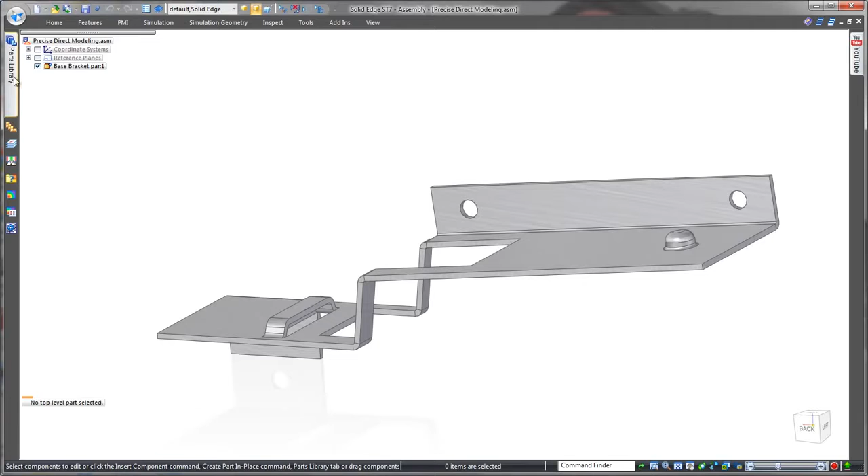First, let's bring in our spring clip and assemble it with the parts it was intended for. Clip to the base, and the USB block it needs to hold. The first precise change we need to make is to close up this gap between the top of the USB block and the spring clip.

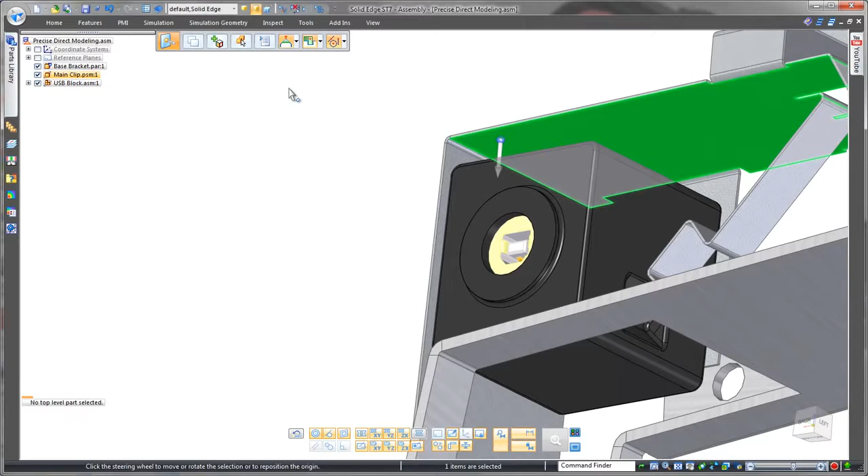In most any other CAD system, you'd have to make this change at the 2D sketch level with sketch relations. In Solid Edge, we can simply relate faces in 3D instead. Easy. Looking at the back, I notice the tabs on the top are not quite square with the top face. No problem, a couple more 3D relations will fix this.

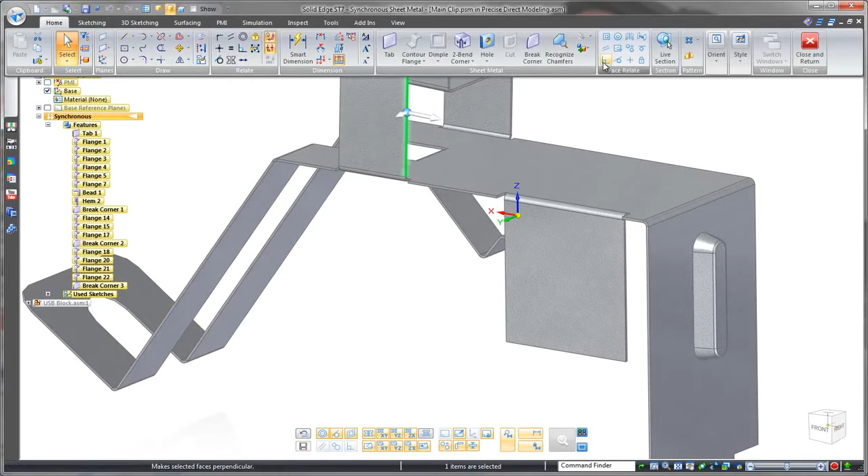For the side faces of the tabs, making them perpendicular to the top. And for the top faces, making them perpendicular to the side. And notice how both tabs are being updated here. That's the intelligence of synchronous technology.

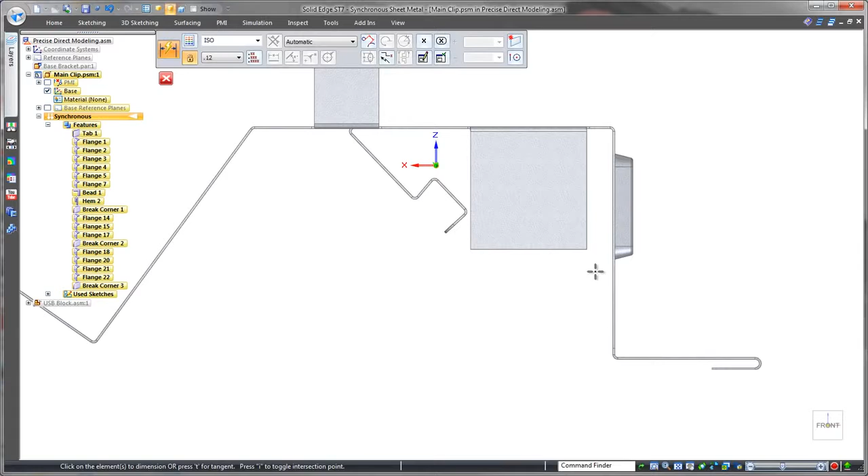Let's start detailing this model. And of course dimensions are key. Solid Edge has two main ways to dimension. The first is like most any other CAD system, in 2D when creating a sketch for a feature, but the second, which you see here, is unlike most any other CAD system, and much more intuitive. Just dimension the 3D model directly.

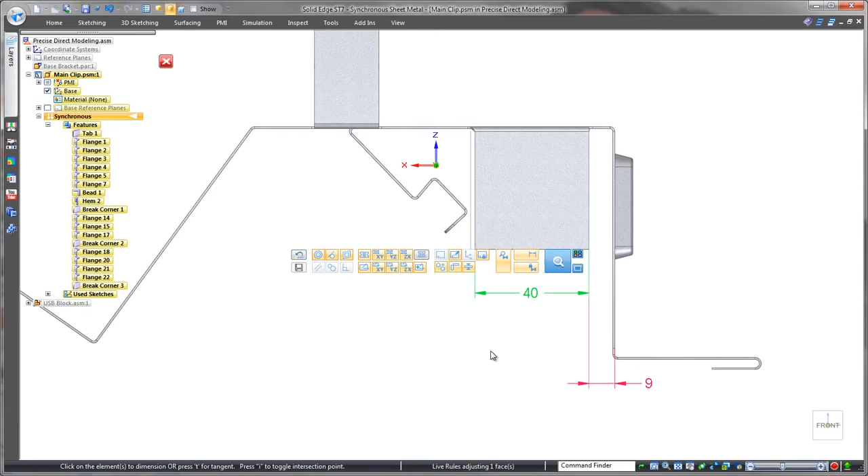We can leave this floating so that we still have the flexibility for further changes, or lock it down to be precise. We'll lock this down and we'll add another one for the flange width. We'll dimension these top tabs next, and look closely at the precise control that's provided. These green arrows allow us to control the direction of the change, which side moves and which side stays put, or even a symmetrical change if we wish.

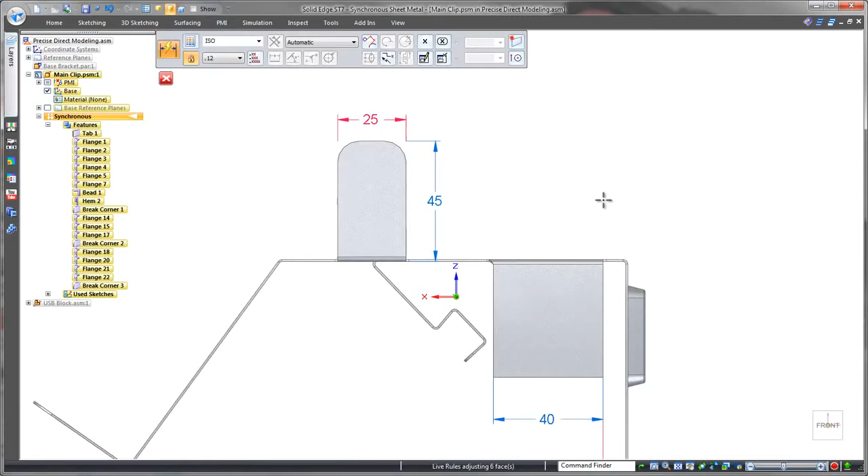We'll speed through adding the other required dimensions using the same technique, and for your information, the red dimensions are the ones we've locked down, and the blue ones are the ones we've left floating. Overall, notice how easy they are for someone else to understand. Great for reviews. Oh, and of course, we're not just talking linear dimensions, let's detail the angle here too.

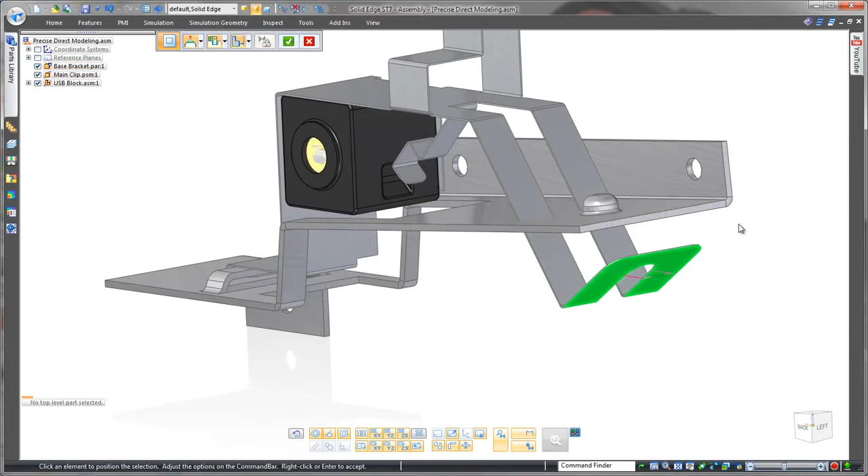We should finish working on the other end of the clip. Another 3D relation will do the trick to move and match the angle of this piece. And we can use what's called the steering wheel to drive a synchronous drag and snap into place here. And let's make sure that the whole thing is assembled centrally.

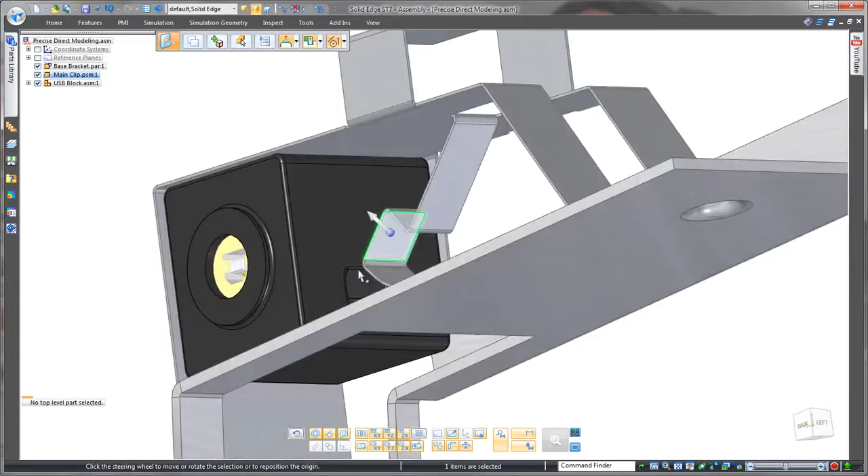Next up is the retaining clip that needs to slot inside the groove of the USB block. Once again, an easy face relation, or steering wheel, drag and snap can be used. Whatever's easier. Perfect. One last sub-assembly to bring in, an inline fuse.

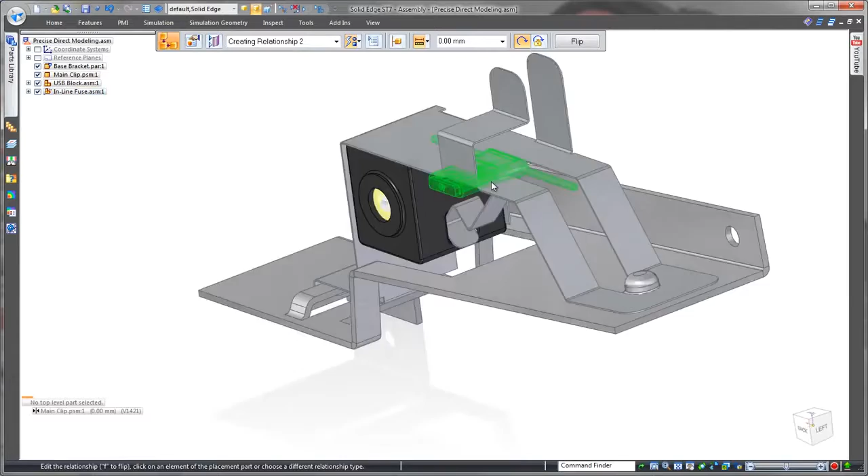The purpose of the top tabs are to support this, so we need to make sure it'll fit tightly into place. So let's make some more precise direct edits. Now I know the wire diameter is less than 3mm, so what we can do is drag the steering wheel to create a 3mm offset before dragging and snapping the tab itself. This leaves us with a 3mm gap, precisely how we want it. Let's drag this section in too, up against the fuse.

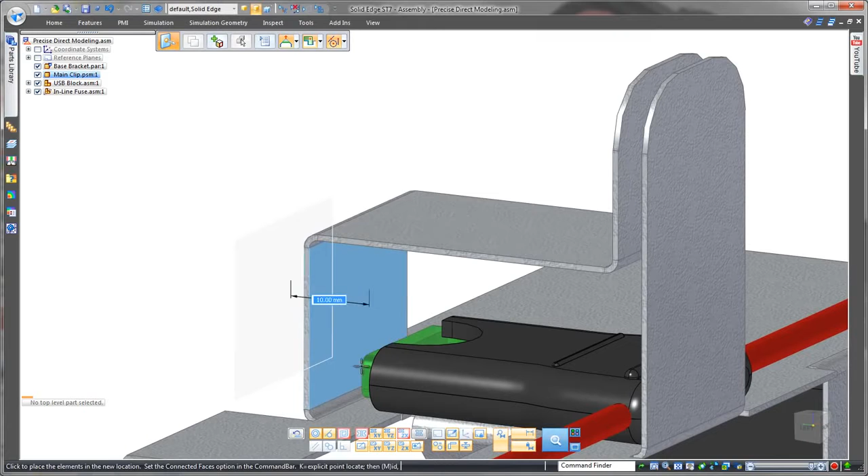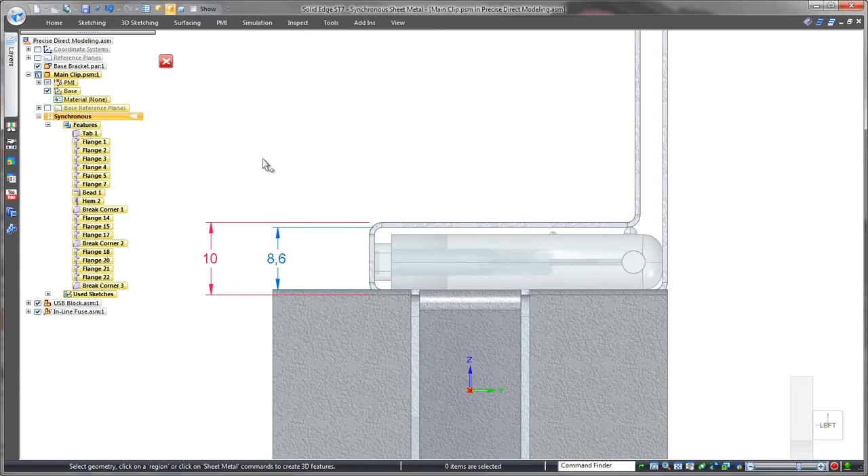Something worth noting is that for sheet metal dimensional control, we can design to either the outside or inside. It doesn't matter which dimension we change, be it inside or outside. Solid Edge will always take into consideration the material thickness.

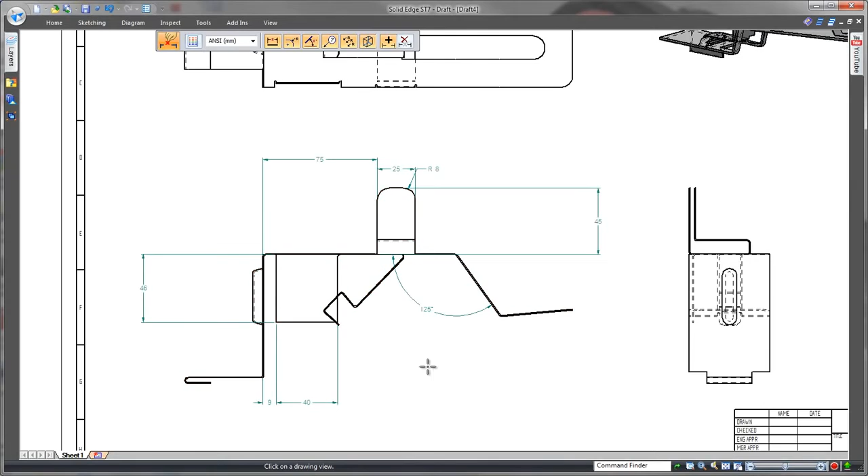Design complete, and of course it doesn't stop there. We can take this same all-in-one concept to final model into a manufacturing drawing. First of all, let's create a custom view of the assembly so that all aspects of the part can be seen. Let's have that shaded, and a few views of just the clip. And remember the 3D dimensions we added to the part? Look how quick we can bring those dimensions into this view.

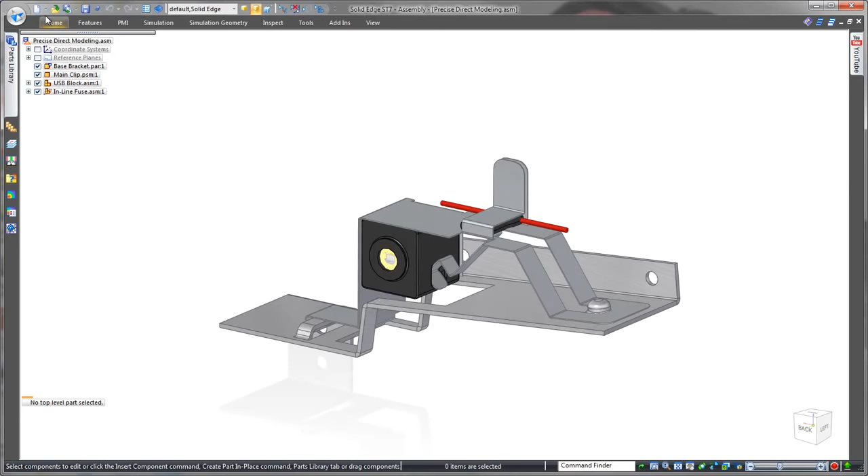So in summary, we've seen how Solid Edge with synchronous technology provides rapid direct modelling, but importantly with precise parametric control, relating faces, dimensioning, detailed drag and snaps, all in 3D, no sketch work in sight. Fast and easy, but most importantly accurate. Solid Edge, design better.